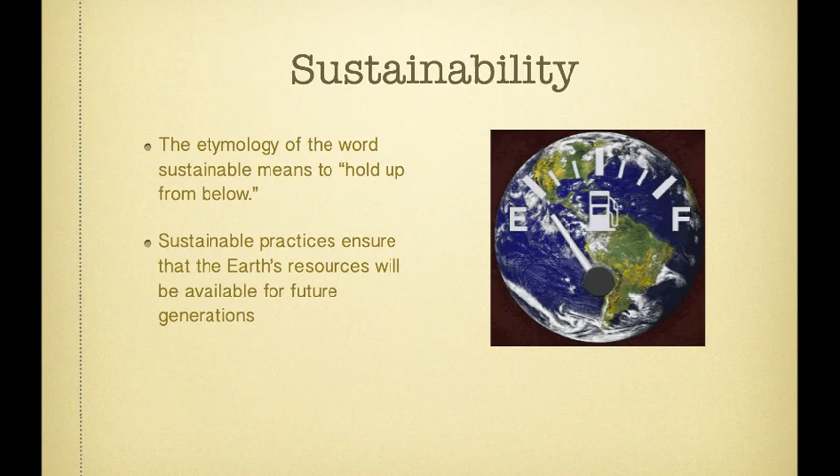The term green has become synonymous with environmentally and socially responsible activities. For the construction industry, this includes issues of sustainability, non-depleting renewable resources, energy conservation, and renewable energy technologies. Green building is a building design, constructed and operated to boost environmental performance over that of conventional buildings that does not destroy the ecological balance or deplete natural resources.

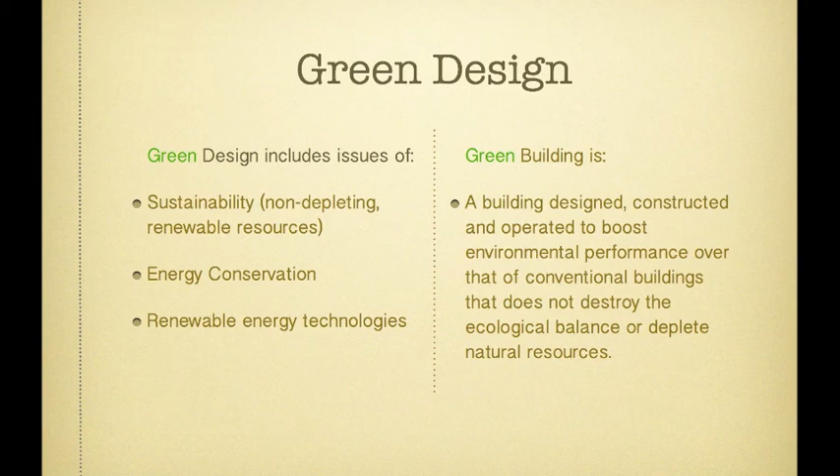Although the United States is currently pushing green design, buildings in the United States still consume a lot of energy, materials, and water. Buildings in the U.S. represent 39% of the primary energy use in the country, 70% of the electrical consumption, 40% of raw materials used internationally, and 12% of potable water consumption.

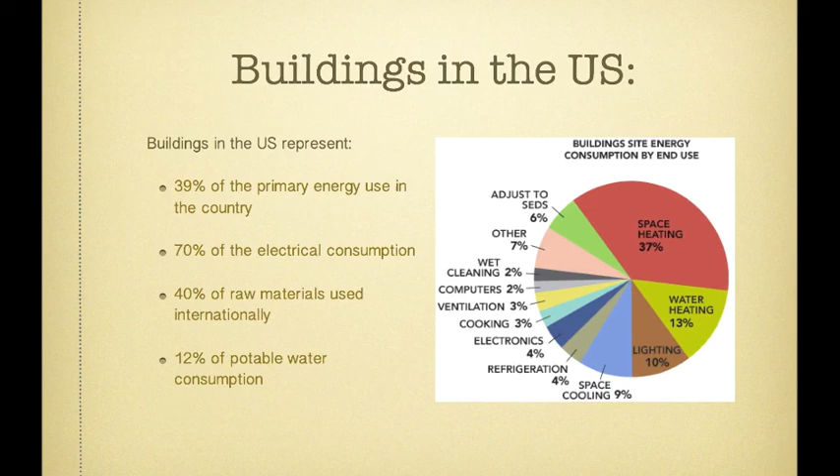Evaluation of the sustainability of construction and finished materials is a complicated process that is currently the responsibility of the designer. Various models are useful in assessing materials.

The Natural Step, or TNS, provides a basis on which sustainable design can be evaluated. It was founded by Dr. Karl-Henrik Robèrt. Along with 50 other scientists, he developed a consensus document describing the Earth's biological processes and how they can make society both attractive and sustainable. The Natural Step's research is based upon system sciences and a rigorous scientific worldview.

Key questions for environmentally preferable building material selection was created by the Healthy Building Network. It is designed for interior finished materials and furniture. The questionnaire includes inquiries into the embodied energy of a material.

The Building for Environmental and Economic Sustainability, or BEES, is an automated tool for measuring the life cycle environmental and economic performance of building products. All stages in the life of a product are analyzed: raw material acquisition, manufacture, transportation, installation, use, and recycling and waste management. BEES measures environmental performance of building products by using the life cycle assessment approach specified in ISO 14040 standards.

You can see in this example of a BEES report that the software allows you to compare materials based upon the environmental performance, encompassing global warming, human health, and indoor air quality, to name a few.

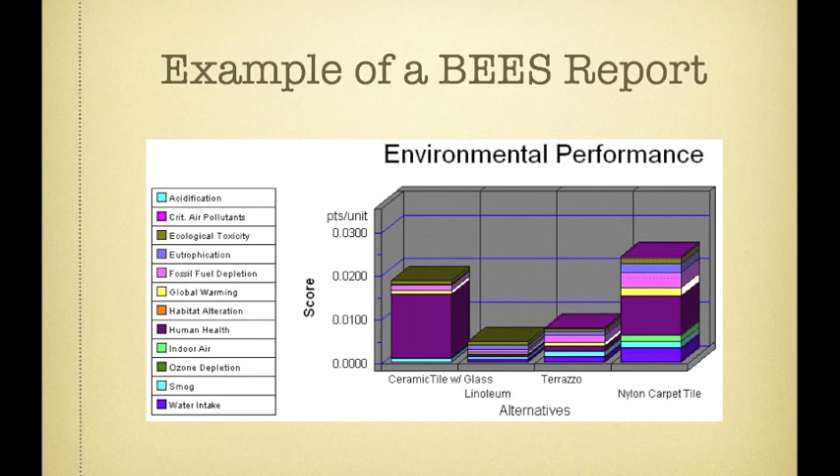The ASTM E2129 organizes the evaluation of materials in 5 categories: the material's environmental impact, the manufacturing process, the performance of the installed product, indoor air quality, and the manufacturer's commitment to sustainability through a formal corporate policy.

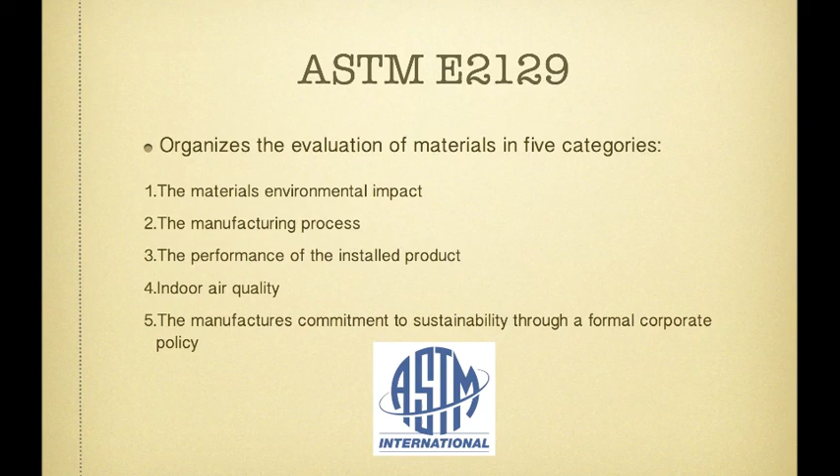There are many things to think about when selecting green materials. Basic considerations for green products include whether the material is renewable or sustainable, recycled or recyclable, durable, adaptable, made with low embodied energy and locally sourced, sustainably installed, removed and maintained, and non-toxic.

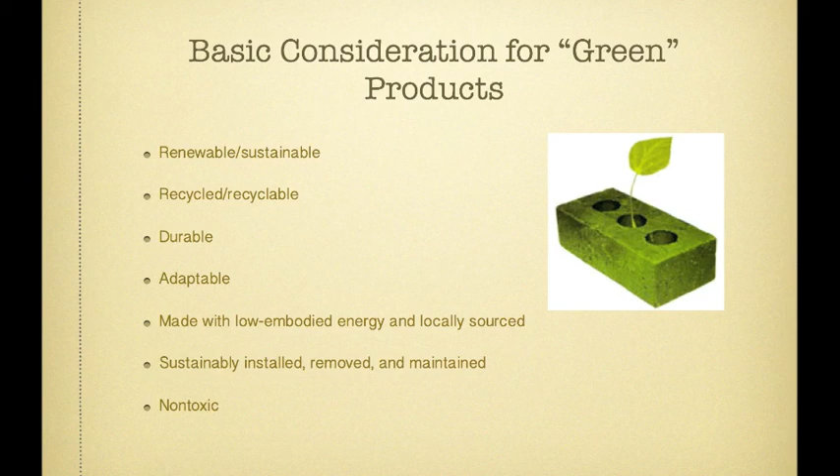To consider a material as renewable or sustainable, think about whether the material comes from resources that can easily be replenished.

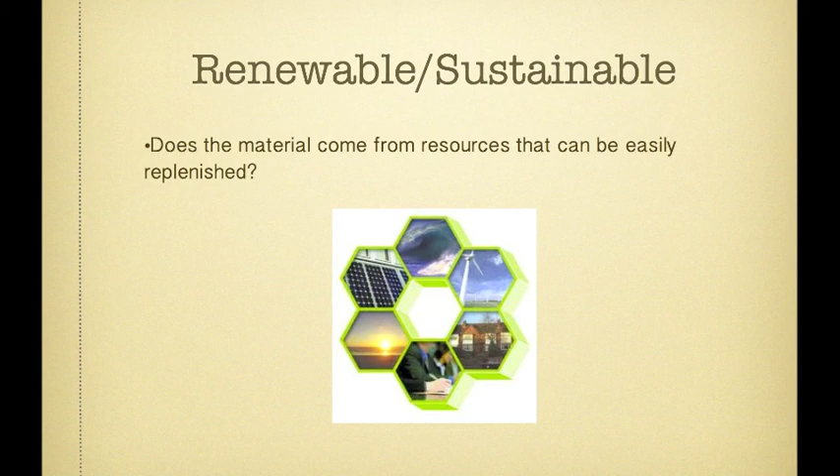Basically, two sources of recyclable material are available to manufacturers: waste from the production of goods, and waste products that were thrown away after use.

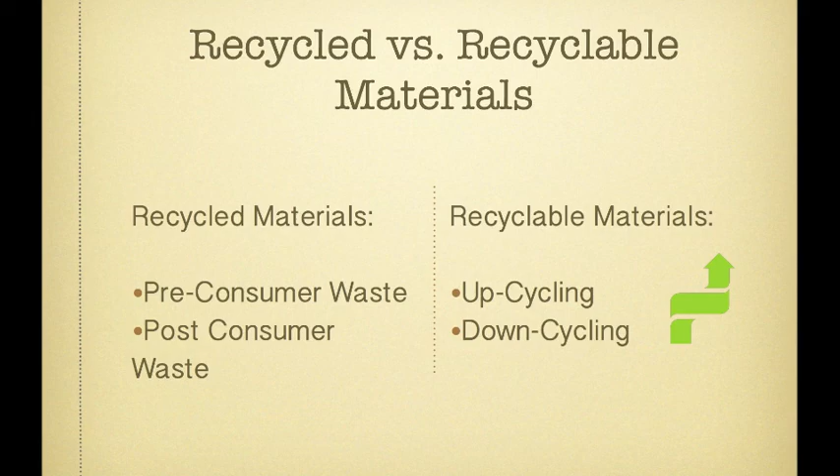Recycling is also known as upcycling or downcycling. A product made from recycled material that is more primitive than what it was made from, such as turning old carpeting into parking bumpers, is considered downcycling. Upcycling is the process of converting waste materials or useless products into new materials or products of better quality or higher environmental value.

The durability of a material deals with its physical strength, what kind of stress the installed material or project is subject to, maintenance schedule, and avoiding trends.

A material is considered adaptable when it is modular, or when a material or product can be reused if the need for it disappears.

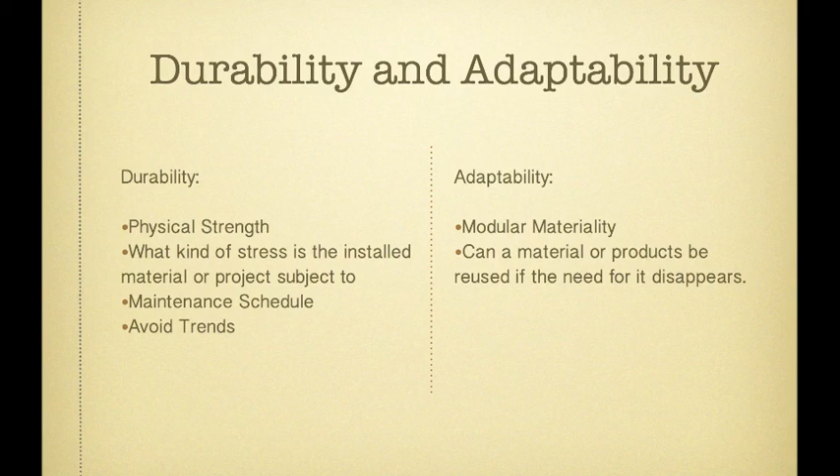Low embodied energy refers to the amount of energy required by the material installed. A material that is used in a condition fairly close to its natural state, versus materials that must undergo several different processes, is considered to be a local material.

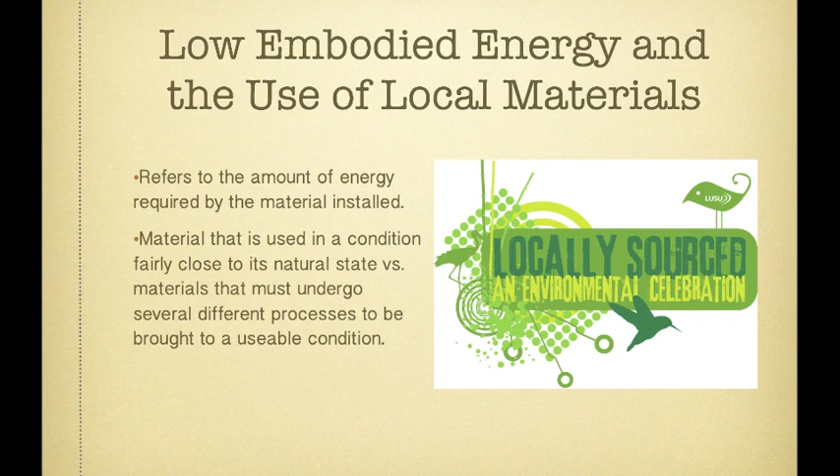When evaluating a material's installation, maintenance, and removal, consider its manufacturing, packaging and shipping, preparation and installation, use and maintenance, and removal and disposal.

Embodied energy is the energy used to obtain, process, fabricate, and transport a unit of building material. For example, the embodied energy for wood includes the sunlight used for its growth, the fuel needed to cut, transport, and process wood products, and to install them at the site.

Embodied energy calculations can also include the material's impact on building heat gain or loss, and energy used for disposal. If you can think of all the steps involved in creating a product, and that list of steps is short, it is likely that the product has a low embodied energy rating.

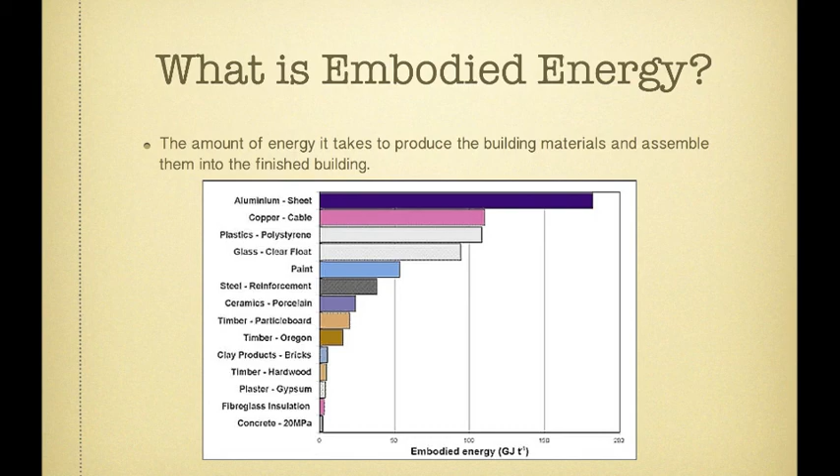This shows relative carbon emissions for three common building materials: steel, wood, and concrete.

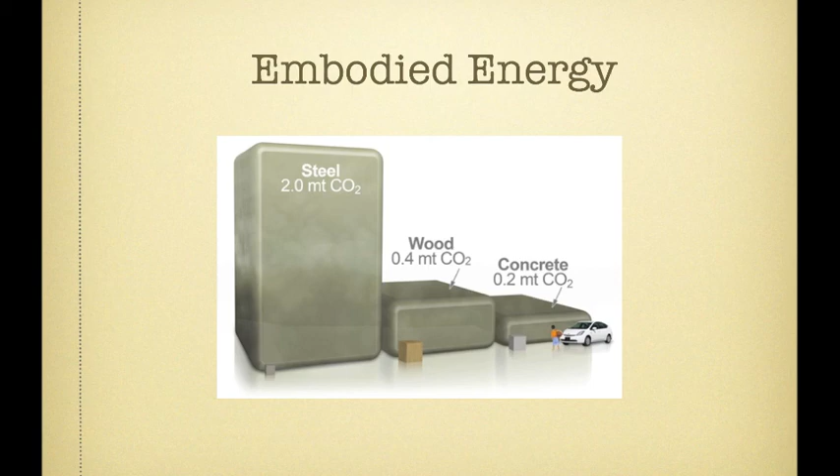There are very few third-party organizations involved in the certification of environmentally sound construction and finished materials. There are two certification programs that may offer guidance to designers seeking verification of the sustainability claims of a material.

The two organizations include the Environmentally Preferable Products Certification and GreenGuard Certification.

The EPP includes preferable purchasing guidelines and consists of four criteria: manufacturing, green energy, health, safety and environment, and end-of-life responsibility.

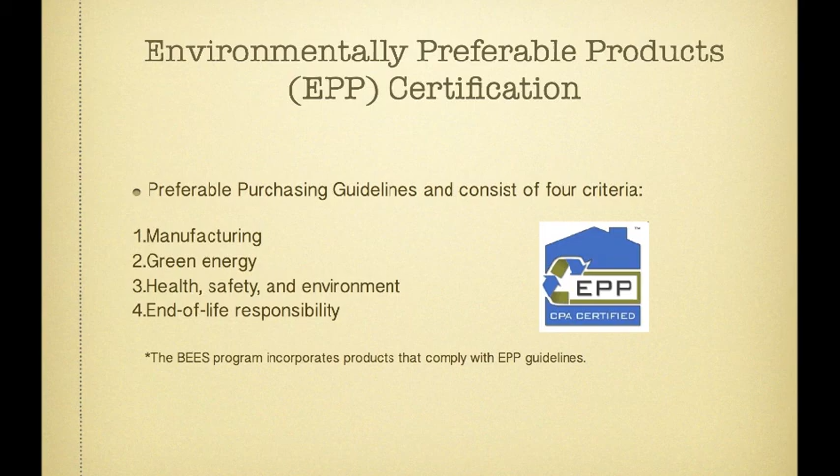The GreenGuard program tests for low VOC emitting products and materials. GreenGuard certified materials are regularly tested to ensure that their chemical and particle emissions meet acceptable indoor air quality pollutant guidelines and standards.

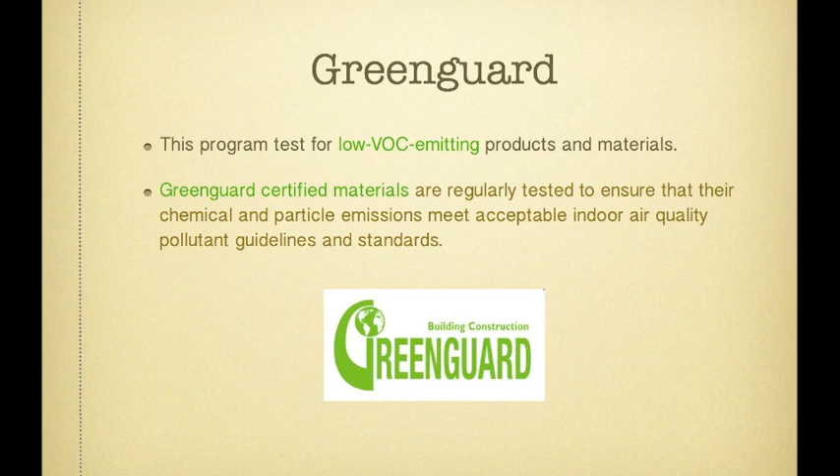The U.S. Green Building Council was founded in 1993 by developer David Gottfried and lawyer Mike Italiano. The USGBC is an educational organization that promotes sustainable design and transforms the built environment. The USGBC developed the nationally accepted Leadership in Energy and Environmental Design, or LEED, standard.

LEED certifies buildings that meet the highest standards of economic and environmental performance, and offers professional education, training, and accreditation. LEED Professional Accreditation recognizes an individual's qualifications in sustainable building.

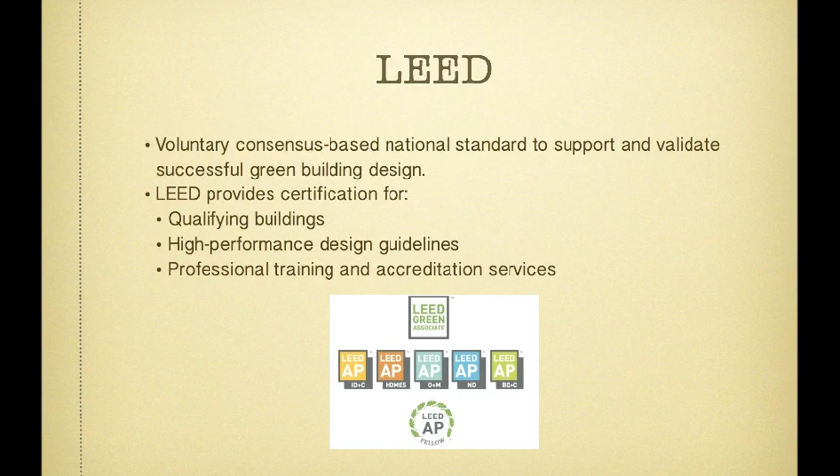LEED standards are applicable to new construction, existing buildings, commercial interiors, core and shell, schools, retail, healthcare, homes, and neighborhood development.

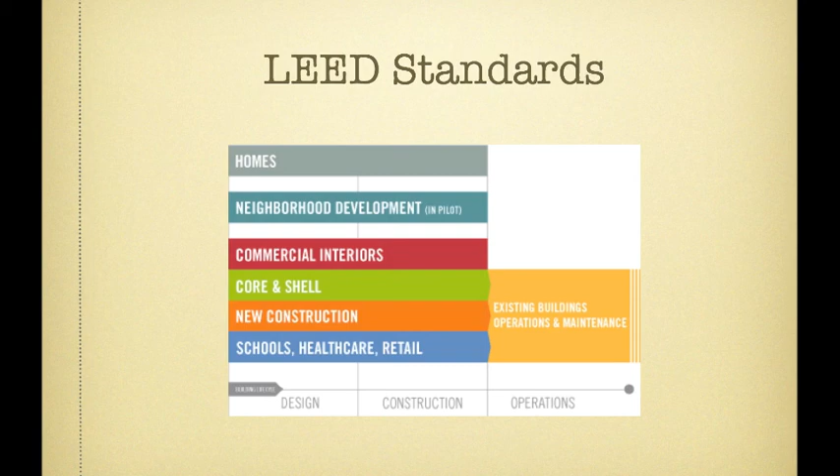LEED evaluates buildings for performance in seven categories, including sustainable site, water efficiency, energy and atmosphere, materials and resources, indoor environmental quality, innovation in design, and regional priority.

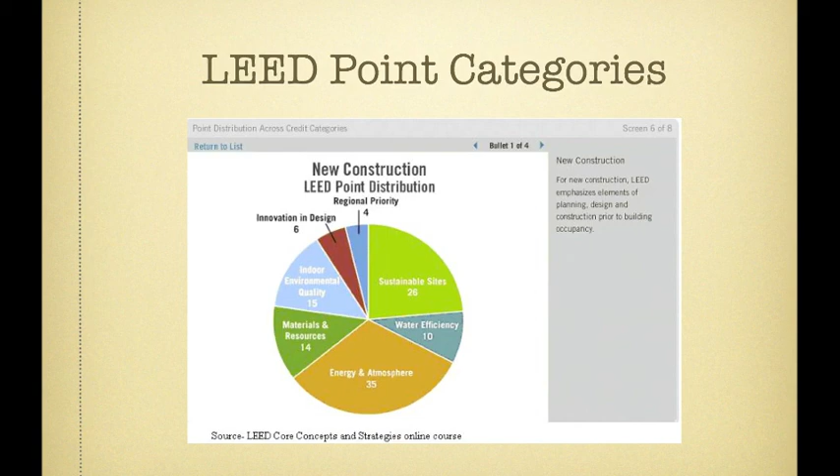Depending on how many points a building earns in each of the seven categories contributes to the overall certification level. A building is considered LEED certified with 40 to 49 points, LEED Silver for 50 to 59 points, LEED Gold with 60 to 79 points, and LEED Platinum with 80 plus points.

Sustainable design and material selection is important because the construction and building industries have a tremendous impact on the environment, and because the Earth and humankind's capacity to absorb pollutants is declining. It is our responsibility to create designs that do not destroy the ecological balance or deplete natural resources.